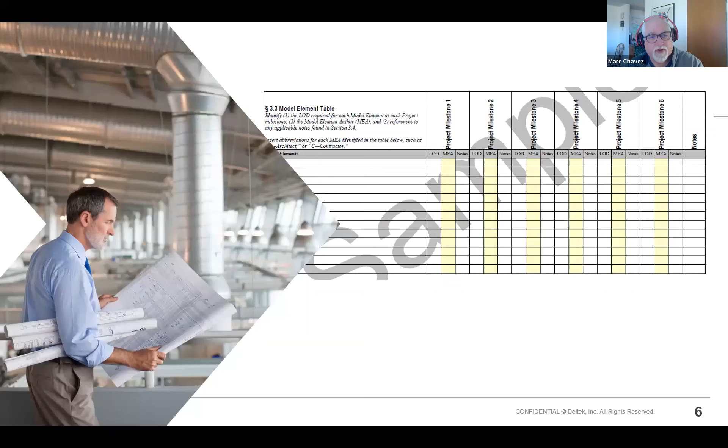So this little clip is from the AIA's document, and they define different levels, 1, 2, 3, 4, and 5, and then they develop milestones that you could hit. So the architect is going to take such an element to level 2 and then turn it over to the contractor. Great, well, wonderful. What's level 2? What does it encompass? What's supposed to be there? So let's take a look at some of that.

We've always had the model be a for reference only thing. And I think something that we can't address in today's talk, but should be addressed in architect and engineering offices everywhere, is that for the best job possible, it needs to become reliable. Architects and engineers, you should be pushing your owner to pay you appropriately to make it reliable. Now, that doesn't mean that that model has to be, as we would have thought about in the old days, 100% perfect construction drawings and therefore ready to go to the contractor.

I'll use curtain wall as an example. Curtain wall has a lot of very important requirements, but many of them aren't drawn. The structural loads, the wind loads, things that the curtain wall manufacturer is going to have to take into account when they engineer and stamp their drawings for the curtain wall. What the architect needs to draw, essentially, is a set of good elevations. We don't necessarily need to draw every single detail for the curtain wall. So our level of development can be quite low when we turn it over to the next step, which is the curtain wall manufacturer.

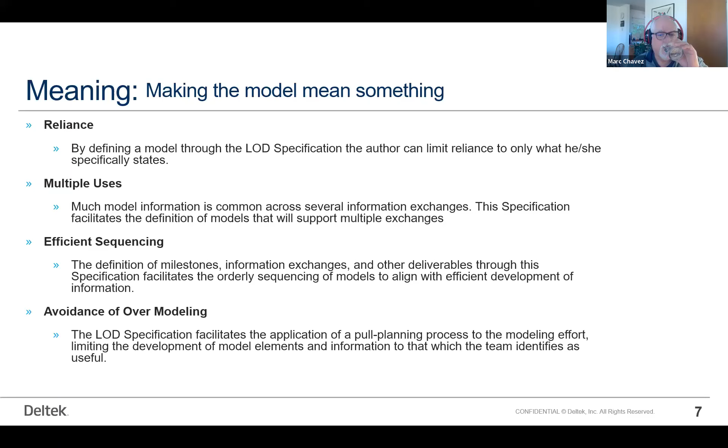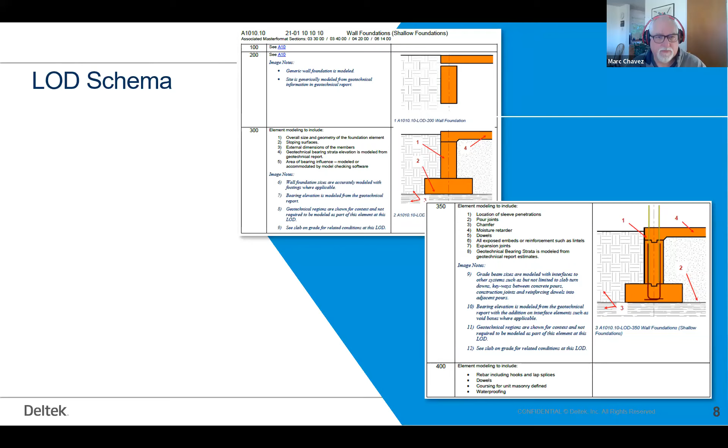Here's a little glance at the LOD schema. The AIA developed it to be more systematic in how we do things and to make things more reliable and to help people know what they were going to get. The LOD took AIA's schema and developed it with some definition to really help it mean something to someone modeling, or in our purpose, specifying products.

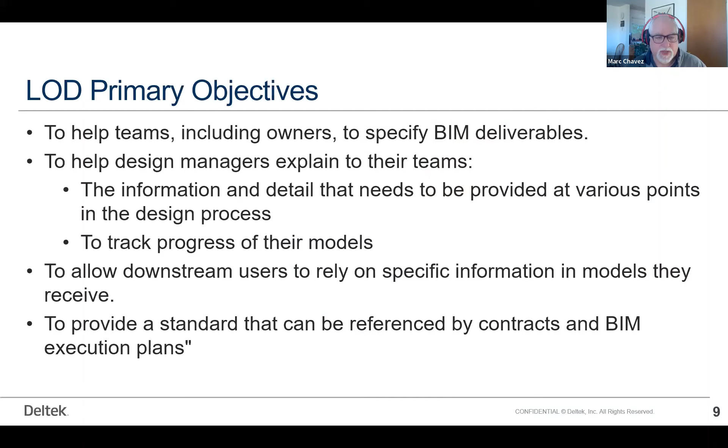So its primary objectives: to help teams specify deliverables, to help managers explain to their teams what we need to make and what we need to do with it, to allow the downstream users, again, I'm using that word, rely upon the information they're getting, and to provide a standard that can be referenced in contracts and BIM execution plans. Note that estimating requires knowledge of the element's quality as well as quantity. Here's all the things that the LOD can do.

If you're specifying that quality, there's 3 different qualities of brick. We usually use the best quality, but you could specify one less. We can all specify the highest quality of paint or a lower quality paint, a higher quality flooring, a lower quality flooring, but it may be the same color. It may still be sheet material. It may still look the same.

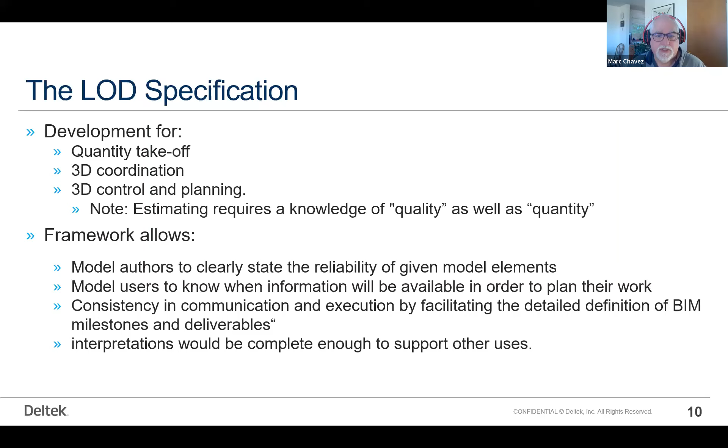The LOD is organized via Uniformat. And here in blue is a little picture of Uniformat. It's CSI's version of Uniformat 2010, with some classes expanded to level 4 and a few cases to 5. It only addresses LOD 100 through 400 of the AIA schema and introduces a new level, LOD 350, to better address information required for effective trade coordination.

It does not address LOD 500, since that really talks about field verification and isn't an indication of the progression of the model or a higher level of geometry or information. And lastly, it does not prescribe who the author is of a particular component at a given LOD. That's up to you and your team members, you and the contractor and the curtain wall engineer.

Get together and make a decision about what am I going to produce at the architect's office? What am I going to hand over to the curtain wall engineer? What is the curtain wall engineer going to hand over to the general contractor when they're finished for the assembly of the curtain wall on site?

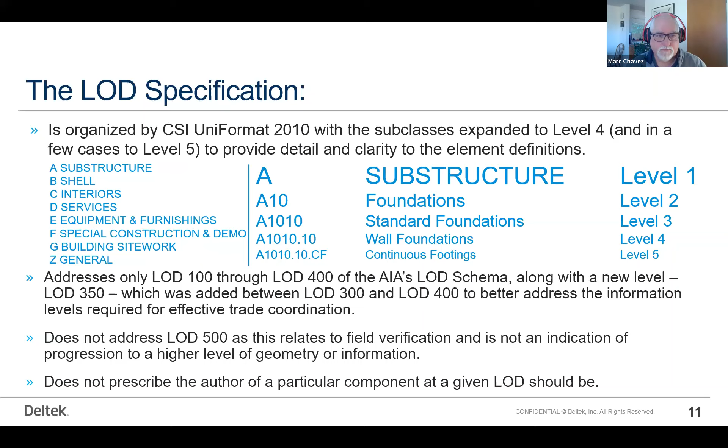I think we've really helped. We're getting pretty bogged down here.

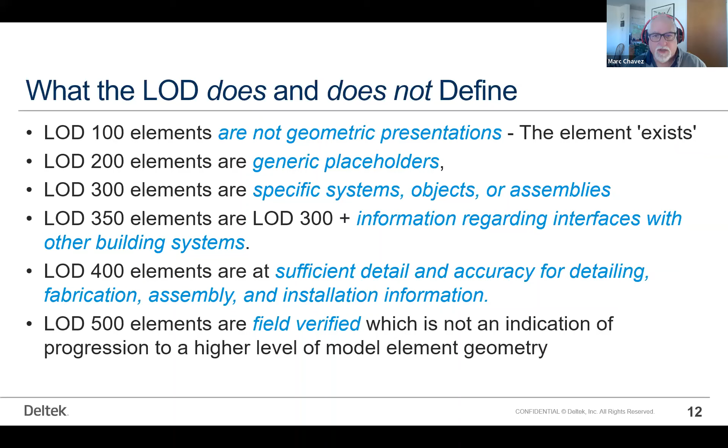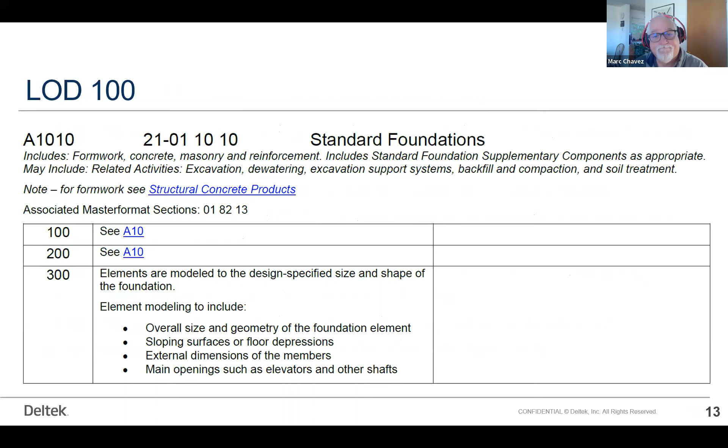And again, I've added the emphasis in blue. That's not what they had done in their document. So let's look at this in a little more detail. So here's an LOD. I just went to concrete. So it's A, substructure 1010. Here's LOD 100. It just means we have some concrete. No picture has been drawn. There's concrete on the job.

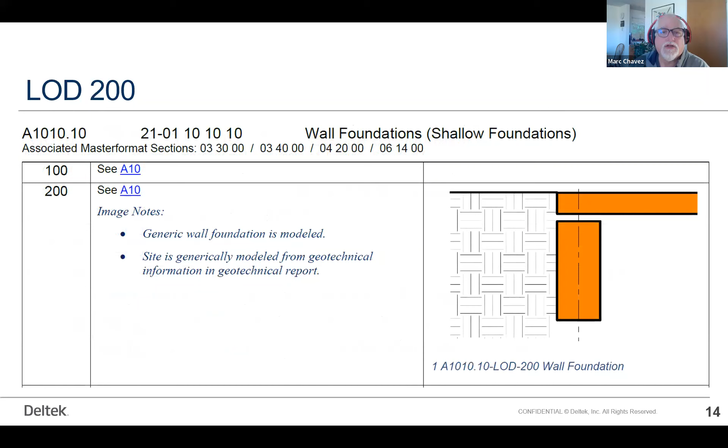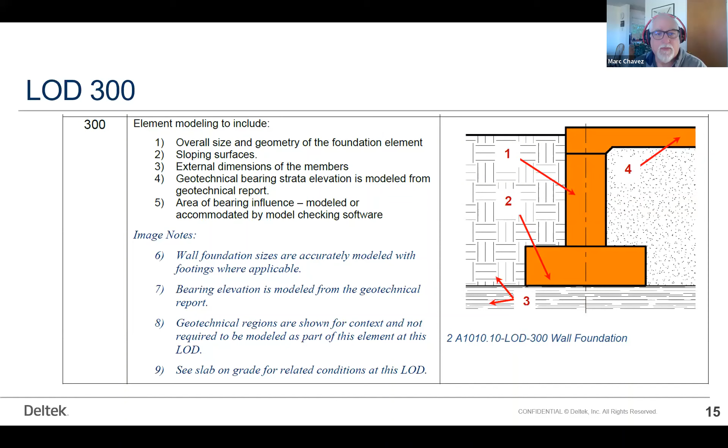At LOD 200, you can see in the little picture here, we have a slab and we have some kind of foundation. This would be the crudest variety of calculating by yards of concrete, perhaps. By LOD 300, we're really beginning to put a little bit of detail in there. We know that we've got the footing, we've got a stem wall, we have a slab, we've got some pieces.

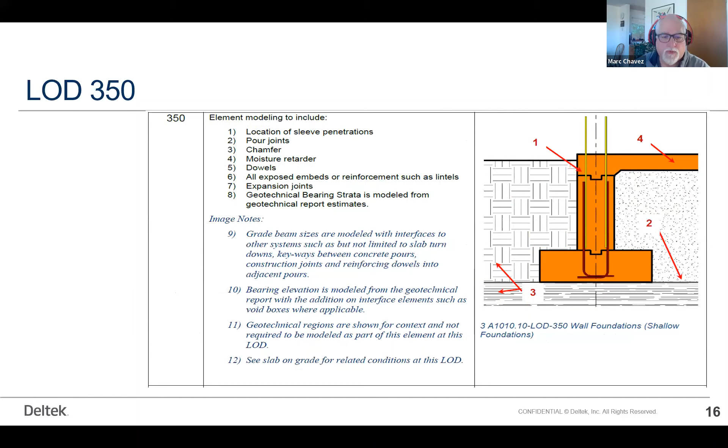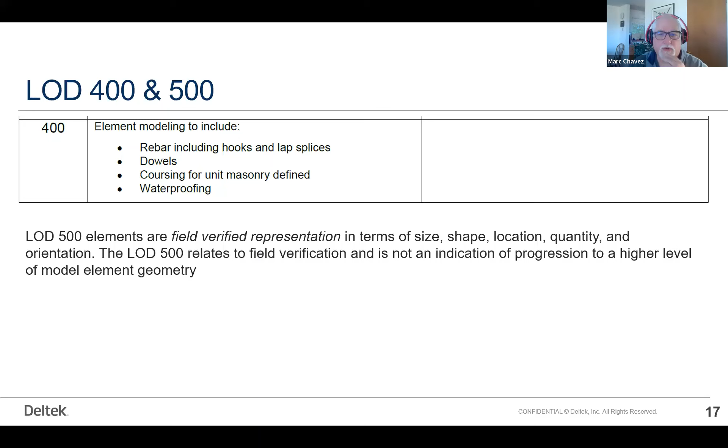When we move to the next level, now we've got some keys shown, we've got some rebar shown. This is pretty much where all of us in the design world would stop. Essentially you'd have some dimensions on there, but this is the end of our drawing effort. We would quit right there. At 400, we would have the rebar shops come back, and dowels, coursing if it's masonry, the reinforcing, waterproofing can be shown.

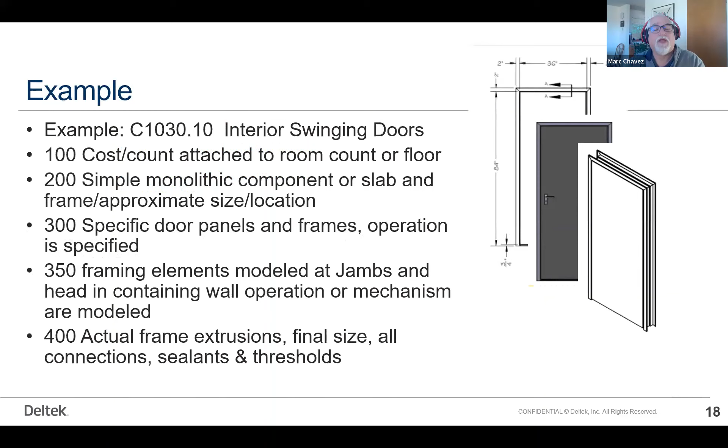Let's take a little more concrete example. Here's a door slab. It's 100. There's going to be about 200 doors on the building. That's it, 200 doors. We don't know anything else. Level 200 in the LOD. So graphically, we're going to show a simple monolithic slab. And you can see we get more detailed as we go down. Level 400, obviously we have extrusions, final sizes, connections, sealants, thresholds, all the little pieces bundled with it.

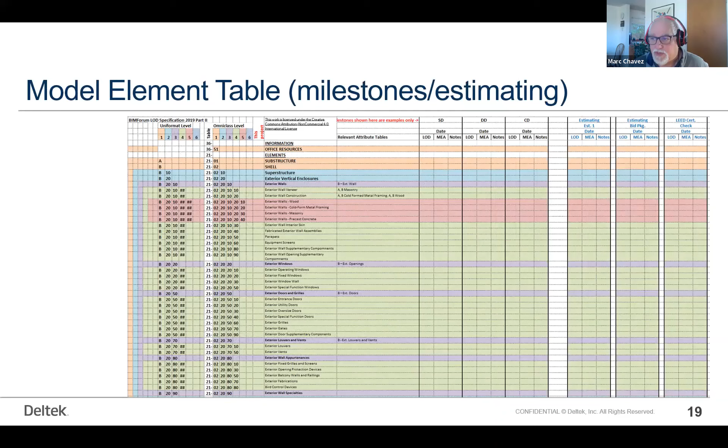Now, moving along quickly, this is a clip from their little spreadsheet. It's very detailed. It's got more bits and pieces to a spreadsheet than I'd ever seen in my entire life. It takes each of the Uniformat levels and lays them out. It also uses OmniClass. Not many people know or care about OmniClass, but it's out there as well. It's a different lecture.

Here's the fun part. Here's this little spreadsheet. It's got some mauvey, pinky, you name the color, up at the top. Now, you can see it says baseline. So as far as LOD is concerned, that mauvey pink area, these are the things that they really want to know. Everything else is optional. They want to know compressive strength, steel flexure, I'm not sure why steel flexure, and shear. Good basic numbers. We'd want to have those.

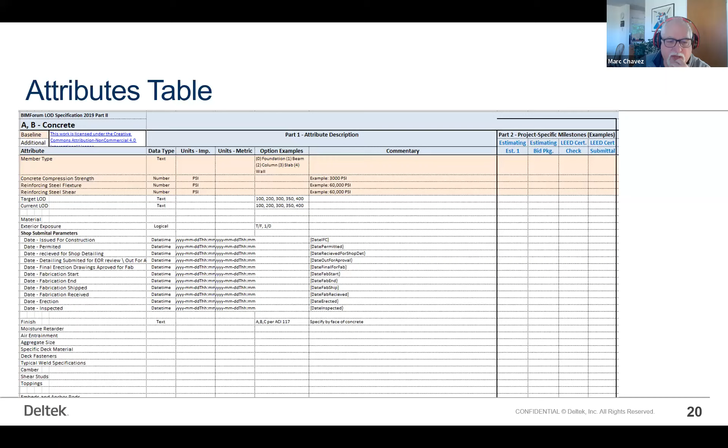But it says everything underneath it is kind of like, well, maybe. So things like air entrainment, aggregate size, specific deck material, fasteners, weld specifications, camber. There's lots of things listed. And I started looking at this and I went, well, okay, but that list isn't very complete, because there's things that can affect time and schedule in concrete that are never shown.

As an example, I worked on several buildings for UC San Diego. UC San Diego likes white cement concrete, and they like to have mock-up panels done out of sequence and before the rest of the schedule gets going. That's a significant expense to the general contractor, and we're going to put it in our specifications, the requirements for that mock-up, how many panels, what we're doing with the finish, et cetera.

That's time and money. It's going to affect the estimate and their bid for the concrete work. So in red here, I've put in a whole bunch of stuff.

Now, for the most part, pre-installation meetings, are they going to cost time and money? 99% of the time, they are not. But there might be 1% of the time where they do cost time and money, in which case I would say use them. Mock-ups, I just talked about mock-ups.

Field conditions that might be extraordinary, that the contractor has to pay attention to, might be important. There might be something perverse about the formwork. I had a friend of mine years ago where the formwork for the job was essentially finish carpentry, very complex, very delicate finish carpentry that had to be looked at, and then, of course, destroyed as you pulled the formwork off.

So it wasn't just plywood or steel forms with backing to hold it in place. It was very expensive. But if you didn't say that to the general contractor, you just said concrete with formwork, they're going to make very logical assumptions about steel pans or plywood or maybe board formed. And then they're going to be done with what they think of as the estimate for concrete.

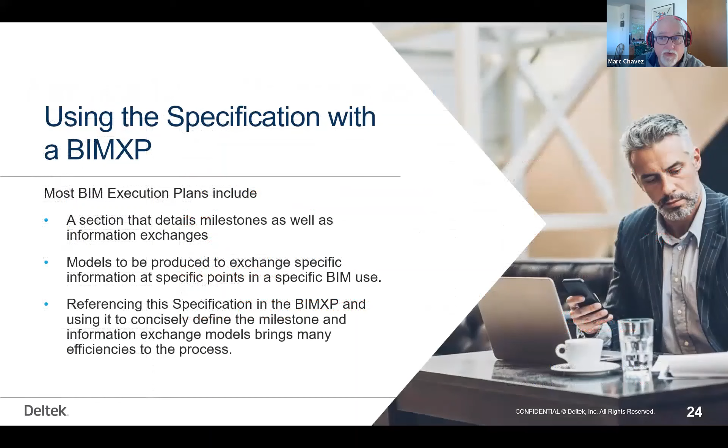Your BIM manager is probably building a BIM execution plan for the job. They should be using LOD in that BIM execution plan for the job. You folks should be, if you're writing specifications, thinking about using a level of specification along with that. We're going to get to that here in just a second.

So just for you who don't know, uniformat does tie to master format. So uniformat assemblies, we talked about concrete, A1010.10 wall foundations. Okay, continuous footings in cast-in-place concrete section pops up. Obviously a formwork section or a rebar section would go along with it if you don't put those in your concrete section. It could be precast, it could be unit masonry in a small house.

They could be treated wood foundations, which I didn't even really know existed, but they do actually exist. There could be spread footings. There's a bunch of specification sections that can come along with that underneath or inside of that assembly, that wall foundation, that need to be accounted for. And the uniformat document has great lists of potential, not necessary, but potential traditional master format specification sections in each of the assemblies that it lays out.

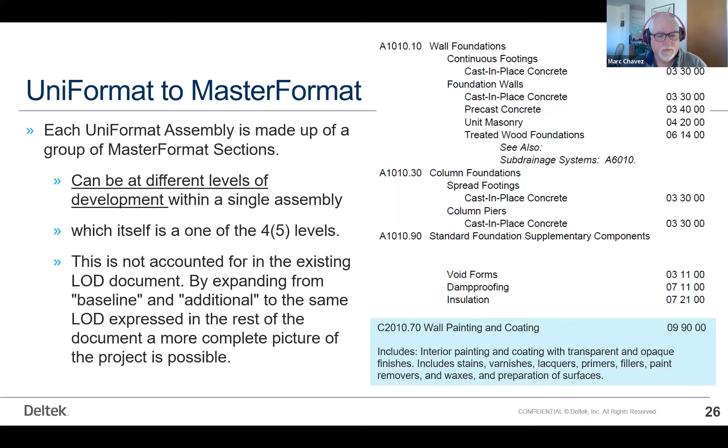So let's look at one of my little brain children here. So we built a level of specification. Schedule impact and cost, these need to be dealt with.

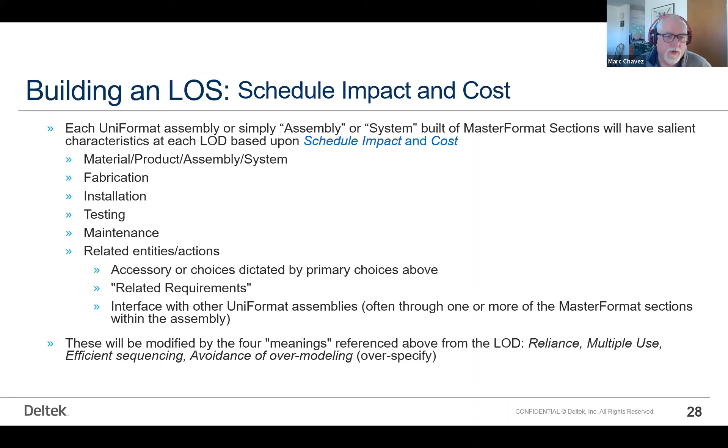So I mentioned that before. We've got the assembly, we've got master format sections that go in the assembly. We want to include things that are going to affect schedule and cost. These could be, and I list them here, maintenance, installation, testing, mock-ups. All these things could affect them. And they're going to modify those meanings of the LOD earlier.

So each uniformat, each LOS, built from a master format core building into the uniformat assembly. BIM and Revit, which is 99% of the BIMs out there, works in assemblies. And if you look in any of the property dialog boxes, grab an assembly, a generic assembly in Revit, and open up the properties dialog box. About 3/4 of the way down that property, you'll see a uniformat assembly, the number may not be exactly the same as you're expecting, but it's in there. It's buried in Revit. It's not just a keynote attached in a text file list. It's in the family assembly.

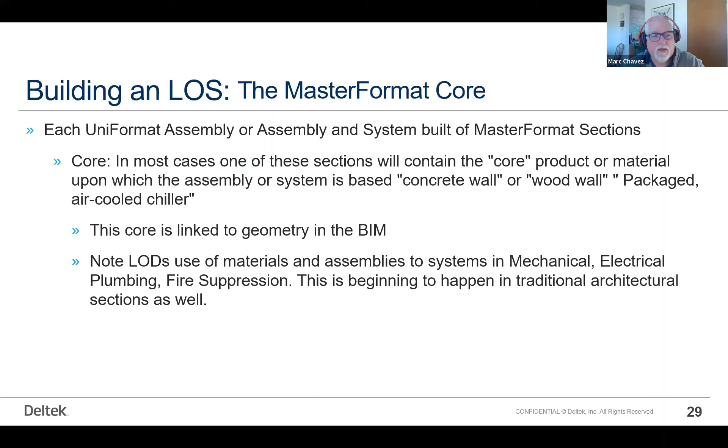The whole point of LOD and the whole point of LOS is that you and your team, and by that I mean your owner, your builder, your trade sub, and you, the designer, work together to define what am I going to create, what am I going to hand over to you, what are you then going to create, add to that, not have to throw it away and redo it, but add to that and move to the next and hand it off to the next person so that we build up.

We don't simply build, throw it away, build again, throw it away. To everyone here in this audience, how many project narratives have you written and then tossed to do the schematic design spec, and then tossed to do the design development spec, and then tossed to do the final specs? What a waste of time.

So again, LOS 100, it's an annotated table of contents. It's a little project narrative. We would like to then build on that to do a preliminary project description. If you want to use CSI's PPD format, that'd be great. Want to use something else, equally fine.

LOS 300, really these are 80% done. They're fully edited specification sections, not customized for a particular job. These might be your office masters.

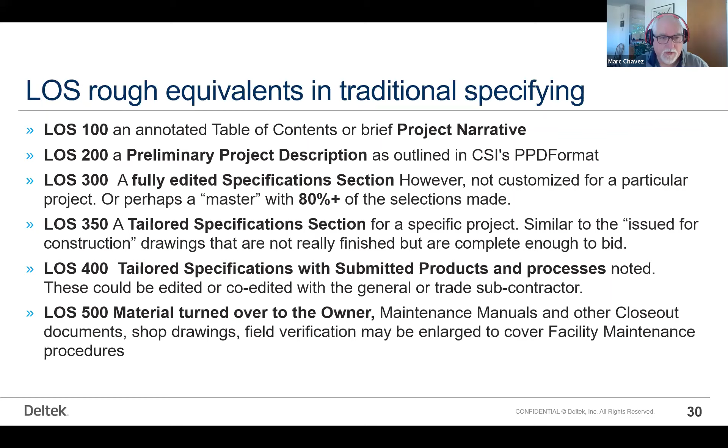So there's some basic questions here. I think hopefully I've answered some of them, but if not, I've answered them again in these last couple of slides. Well, what if the graphic content and the non-graphic content are at the same level? Well, I don't think they're going to be. I think in many traditional spec sections and in many assemblies, they're going to be very different.

Who decides which is right? The team decides. It's the team project. There is no such thing as a master builder. There probably never was, but if there was, it was a long time ago with many fewer materials.

You have to be paying attention to that trade subcontractor. That person who can stand on their knees and lay the tile knows more about laying that tile than you do. You need to pay attention to them. Likewise, you're liable to know more about design and conceptually what you wanted to have in that building than they do. You have to work together as a team to get the thing built.

Can they be different and still serve the purpose? Absolutely. In fact, as far as I'm concerned, I would encourage you, like the curtain wall example, to have a very complete request for proposals for your curtain wall people, including all the structural loads and the wind loads and the seismic importance factor, all the stuff the curtain wall manufacturer is going to have to take into account to give back a decent bid, a decent proposal for the curtain wall. But as far as drawings are concerned, you know, Bud can talk to us later about it, but I think a decent elevation is just about all they need.

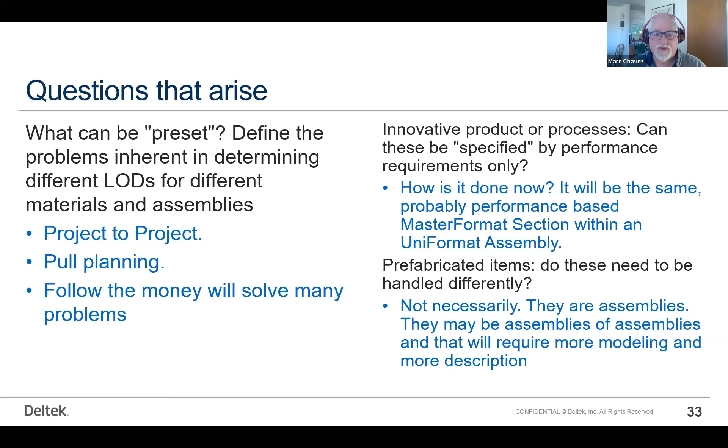We need to be more and more assembly-based, and that means, if not Uniformat, some other format—we're going to have to come up with something that gets us to assemblies. Prefabricated, manufactured, or fab-by-the-team is absolutely coming down the road, and it's coming faster than a lot of architects realize.

So LOD is a reference tool that can really help us organize our graphic material, and then we can use LOS to help us organize our non-graphic material to build a successful project.

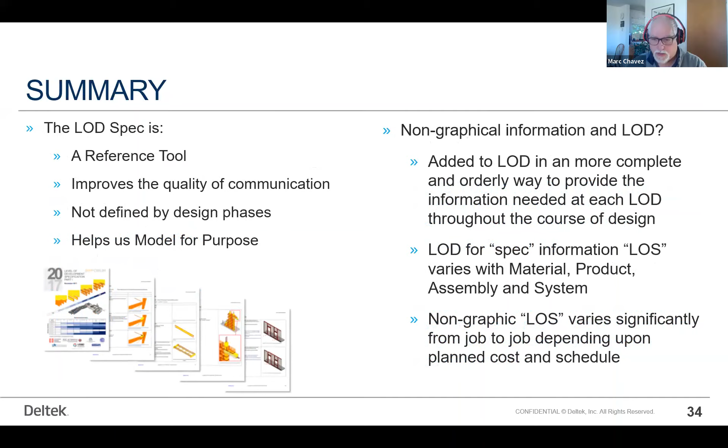So we've got 8 minutes, and I've got the question slide up. Scream, yell, hop up and down, tell me I'm wrong, ask me questions. Ask Carrie questions if you've got any more for her, because we've got a couple of minutes. And I'll stop sharing—there we go. Now I get a full picture of Carrie. I'm not sure Carrie's ready for that, but you're filling my screen. Hi—nobody has questions. Let me open up the chat, see if somebody's like, why the hell? No, we just see 1s and 2s. Anyway, hopefully that was clear.

Our new product deals with assemblies—it's assembly based. I should say, can't call it our new product anymore because I retired. I no longer work for Deltek, but their new product does that. I know Beth was gone Monday and Tuesday working with the folks who took over, RIB, who took over for BSD. They're chewing away on the future of their product.

Life is going to be in a database, folks. It will be in a database, which is why I used BSD's product for years, because it's in a database. Specifications are going to be in a database. Why did we have a 3-ring binder with an outline format? Because everything was printed in a book and you wanted to be able to find stuff in the same place every time.